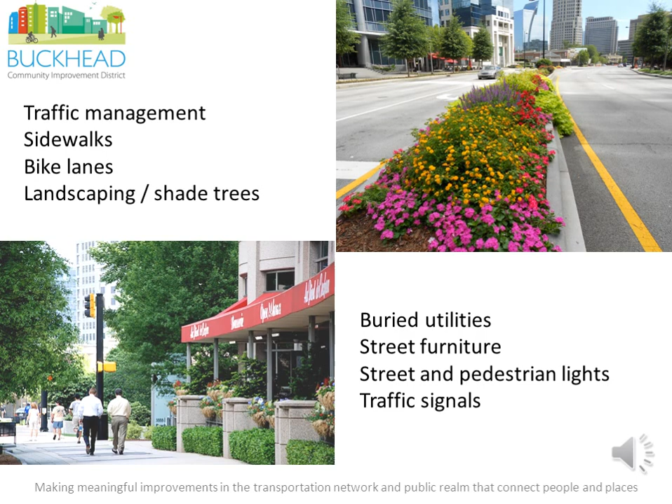The second phase of Peachtree Road transformation starts right where the first phase ended. It's what you see under construction right now, and it goes all the way up to Roxborough Road, Peachtree Dunwoody Road. We're doing the exact same thing in this area that we did in phase 1. And this phase is going to be substantially complete, believe it or not, in about a month from now. At least that's what the contractor has been told, and what they have said they are going to be able to live up to. There will be some things that will need to be completed after the end of August, punch list items, some of the planting of the landscape, because you don't want to be putting trees out there right now. You want to wait until the fall or the winter to do that.

What I've got up here are some images to give you a sense of the kind of things that we need to do with this transformation. We've got the general manager of the Ritz-Carlton here, and he knows that out in front of the Ritz-Carlton there is this big Georgia Power vault that's sticking up, this big block right here. This actually is the new sidewalk that will go in here. That's the level of the new sidewalk. We went ahead and had Georgia Power do the work they needed to do so the contractor could come in and just marry the sidewalk up with that.

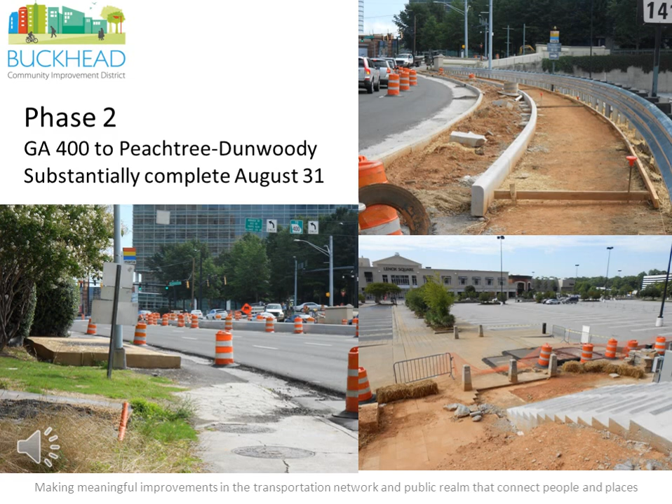Here's the sidewalk that's going in across the street in front of Lenox Square. And I put this image in here to show you how Lenox Square is redoing their pedestrian promenade to come up and actually meet the streetscape that we are creating. So they are embracing this new front door. And that is a great example of how the public and the private sectors can coordinate and work together to create a better environment for everybody.

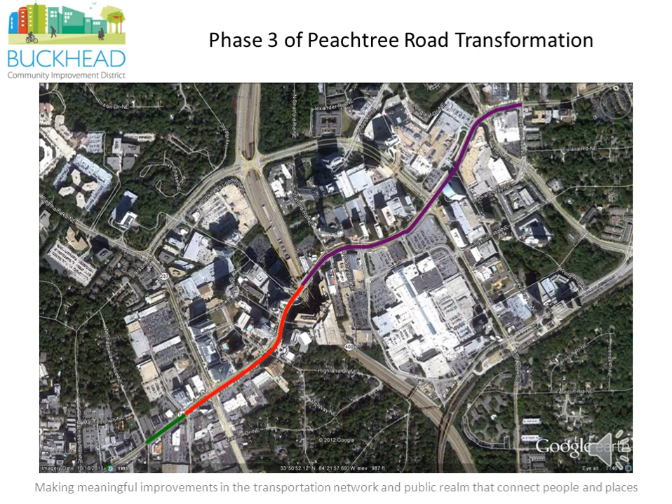That's phase 2. Then we've got the third phase that we have also been working on. This is down here, starting at Maple and going down to Shadowlawn. This was conceived initially and has gone through design to get things ready to go. We are still working on refining what the concept will be here in phase 3, but we're making progress there, and we may give you guys a break and not get to work on that for a while so you can get to enjoy Peachtree without orange barrels out there for just a little while and appreciate how well the corridor works.

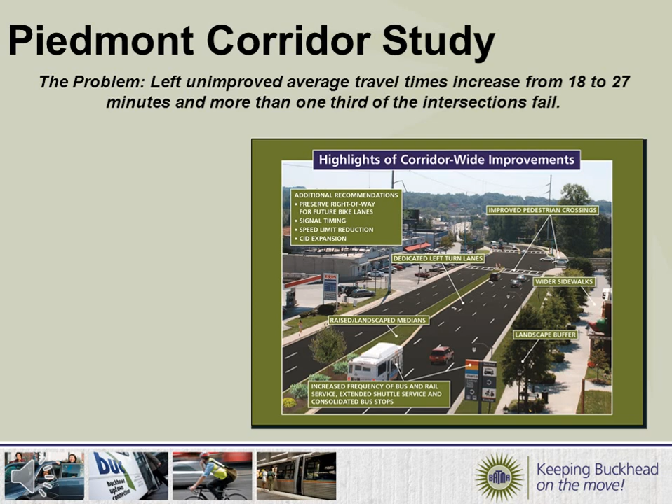Since we tackled Peachtree, we started looking at the need to address Piedmont. And I kind of look at this as Peachtree is sort of our pretty pony, and Piedmont's really more of the workhorse of the community. So this study was done a couple of years ago, and actually Jeff Smith and Kimberly Warren, who worked with us on that, are here today.

Basically, Piedmont was in trouble. When we looked at the initial conditions on it, we were looking at travel time increasing from 18 to 27 minutes, and also more than a third of the intersections operating in failing conditions almost all day long. So that's a problem. So we began with a typical focus group.

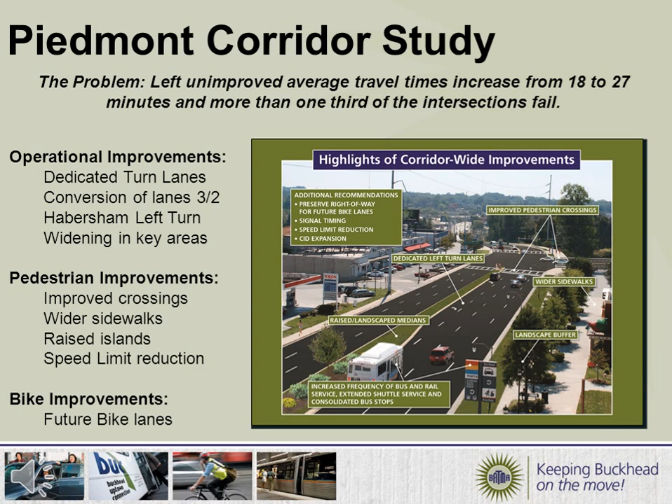The first slide is about the improvements that are more directly on the corridor, and you can see the type of things that we're proposing to do. One of the key things that we're doing is reallocating the lanes. Right now you have 3 north and 3 south. Well, all the traffic is southbound. So we're reallocating the lanes to have 4 southbound and 2 northbound. A little bit counterintuitive, but those are some of the types of things that are in this study.

Piedmont is also directly impacted by other forces outside and accessing the area. Commuters that are coming through and making connections directly impact Piedmont. So the connection that's now under construction with the 85 to 400 interchange is going to be a significant improvement for the corridor. And you can see we have several different recommendations that came out of this about access to the area to provide relief for Piedmont Road.

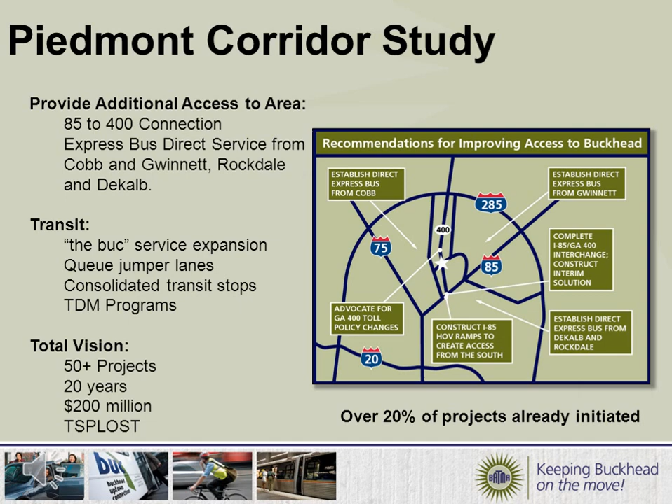As I mentioned, it's about a $200 million scope of work, and one of the things that's really important is $50 million that's in the TSPLOST list is going to implement a number of these recommendations that you see in this study. So that's an important thing for this community.

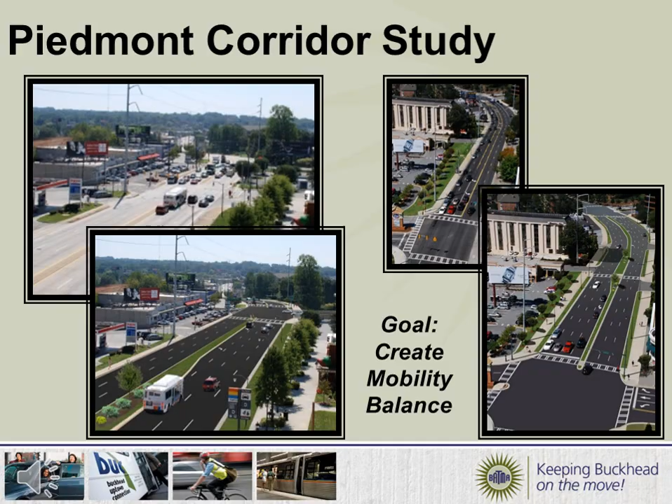So this study has a 20-year horizon of projects, so a lot of the things are coming forward now, and it's already, I believe, about 20% complete when you look at the projects that are in the list.

One of the recommendations in the Piedmont Corridor study was how do we address a big problem on Piedmont Road up at Habersham Road. I presume you're aware of this famous bottleneck. So many people coming up Piedmont want to turn left on Habersham that they end up capturing the left lane, because the turn lane is too short for the queue of cars. So you're effectively taking away a lane of traffic on Piedmont heading north, and that creates the bottleneck that backs things up all the way to Peachtree Road at times.

So we are in the process of doing the final work to get this area prepared for a major improvement, where we are going to be creating a continuous left turn lane all the way down to this entrance into Piedmont Center, so that cars coming south will have a left turn lane to come in here. Cars coming north will have a left turn lane to get in here, and we will get back to having all the through lanes we need to handle the traffic in that area for the foreseeable future.

In addition, we're going to have good sidewalks up there. Georgia DOT has approved all this. Georgia DOT is putting money into it. And Brian, when do we think this project will be under construction, and what's the construction period? Next year, and it's less than 1 year. Okay, so 2013 it will be under construction and it'll be done within 1 year.

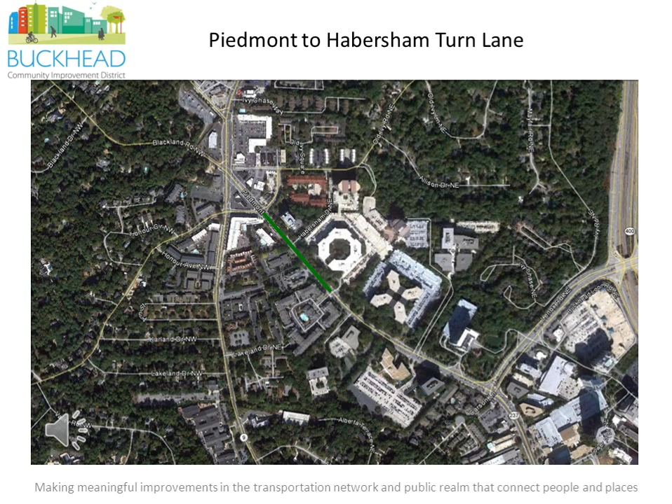This is a great example of how the organizations work together. The CID funded the study that BATMA then managed and conducted the public engagement for, and then the CID is funding the initiatives like the Habersham turn lane that came out of it. So it's a great example of how the organizations are collaborating.

And while we're talking about Piedmont and traffic backup, one of the other programs that we have funded for many years now is the program of having traffic officers out there to help pull the traffic out of the Buckhead core area to get folks on their way home. So this is a program that we've had for quite a while, and recently we took a look at how well that program was working. It was doing okay. We said, you know what, we can do better.

And some of the improvements that we made were where we were having the officers stationed, making sure that they all had the same radios, not only the ones that we are paying to do this work, but the ones that private property owners are paying. They all have radios now on the same channel. All of their activities are coordinated right now so that it really does work as a system to help move the traffic through the area.

Another program that we have just embarked on is a very novel program. The idea is, can we capture video from the traffic intersection cameras in Buckhead, analyze that video, be able to determine how many cars are going through that intersection, how many cars are turning, how many people are walking in that area, get all kinds of data captured that we can then analyze and then do something with

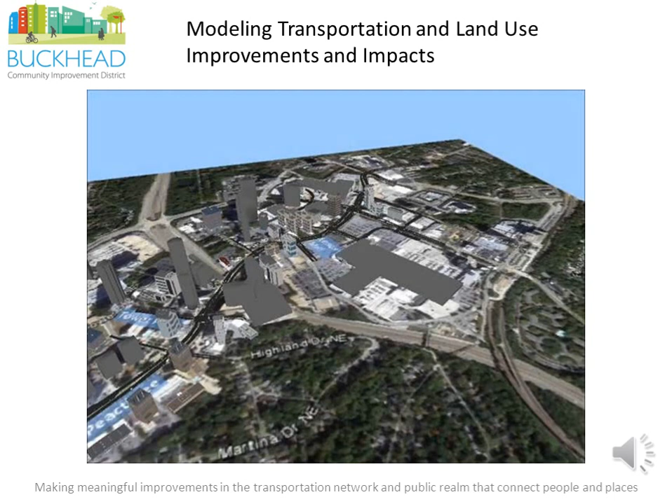We're in the process of getting that model all wrapped up, and we have been doing the calibration of it, and we've started testing some of our ideas about improvements that we should consider investing in. So this is, I believe, a really big idea, a great tool for us to use to make sure that we're really strategic about the decisions we make and can test all kinds of what-if scenarios going forward. So this is a major investment for us in this tool.